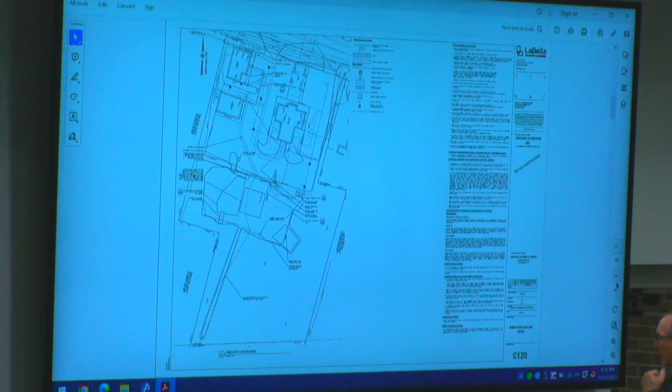I was planning on reaching out to him sometime next week to discuss that. There is room for a vehicle to be in the entrance and not in Route 376, and there is also the opportunity for them to bypass that initial entrance and come around through the entrance further to the east. I was going to discuss that with him and see if those were options, because he may have you sign something or put some signs up or something like that. Okay, so you'll have to discuss that with him, but I concur. I think I noted that as an issue early on, so I think that's something that has to be addressed.

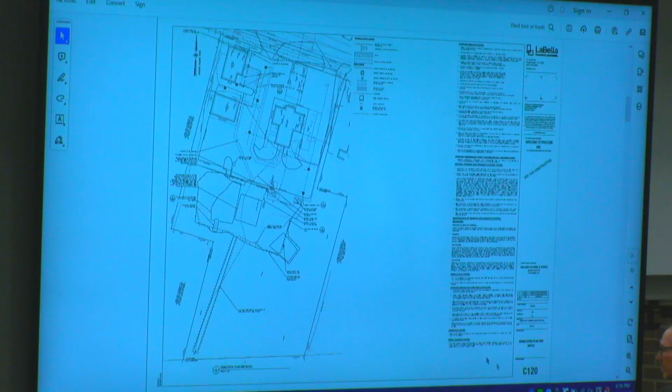He also wants you to indicate the location of the tenant parking spaces. Where are you proposing for the tenants to park on the site? Can you point it out? So let me switch to that sheet.

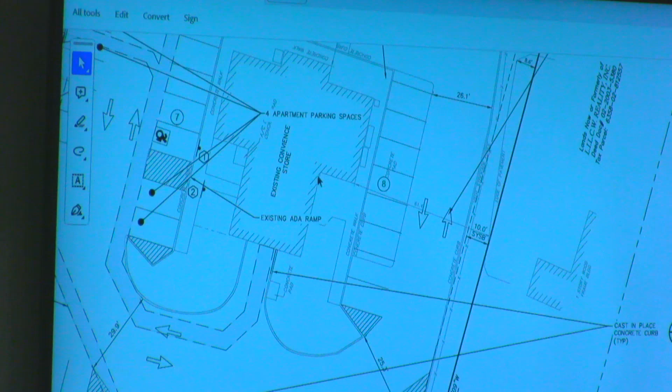So we identified a few locations for tenant parking, given the nature of the site. Spaces here would be for this building, and spaces here and here would be shared between this building and this building.

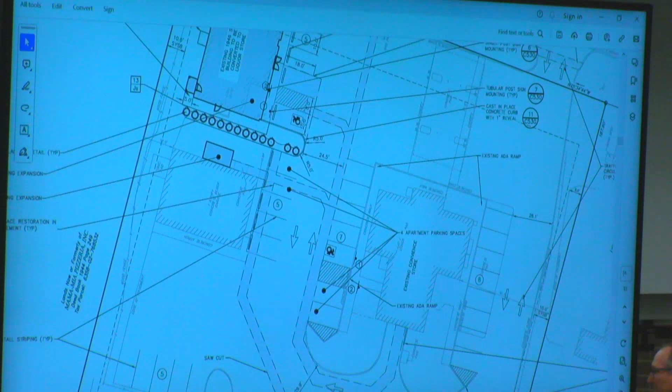Are you planning to sign those spaces as tenant parking only? We hadn't intended to do that as of yet, but we were open to it. I think you may have to, because you can't have a tenant living there come in and find all the spaces taken up by people who are in the store. I would imagine you'd have to at least have some designated spots for the tenants. We can add signs to the plan, that's not an issue. That's something else to address with the traffic engineer.

You also are due to go, I don't believe you've been there yet, to the ARC. Yes, my understanding is the plans are still being developed, and I don't believe they've made a submission yet. Okay, because we cannot close this public hearing until you've met with them, since our public hearing is their public hearing too, so we need to see the drawings. This will have to remain open until they've gone through the process with the ARC.

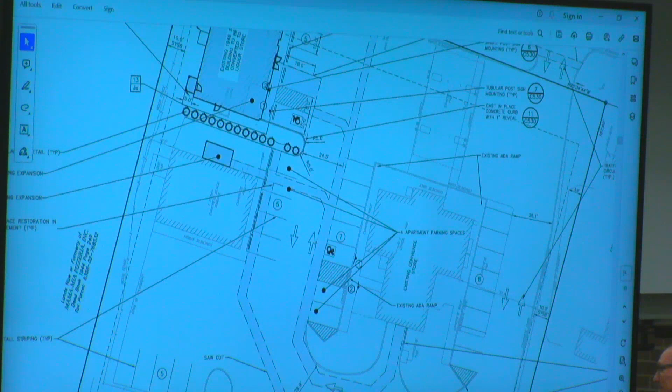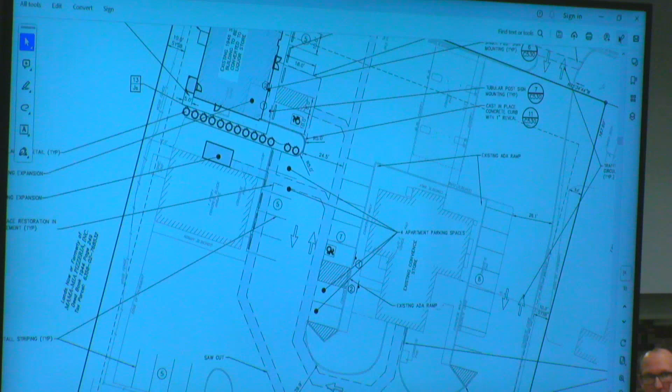Understood. And I know there was some question about the sidewalk path in front of the building that doesn't currently exist - I thought that was added into the plan? Right along Route 376. So there is currently a portion of asphalt that runs along this edge of the building. It ends somewhere around where the cursor is. We are proposing to extend it around to reach the entrance for the apartments in the rear.

But I'm talking about eventually - the idea is that we have sidewalks on, I assume, both sides of 376. So I'm saying that for any projects put in front of us, there should be some proviso made for sidewalks in front of this - proper concrete sidewalks meeting pedestrian specifications. Along Route 376? Yes, there is an existing sidewalk, I think, at least on one side.

So there would have to be - I know there are some setback issues here too, if I'm not mistaken. Am I correct in saying that? I'm pulling it up so you can look at what's there right now. But we've exempted the applicant from that under our discretion, grandfathering the building in from that point, but still wanting to have the sidewalks. Am I correct in saying that, or no? I think it's definitely a good discussion to have. It depends on what happens with this area in the future, and I'm looking right now, there doesn't appear to be anything planned down the street at all.

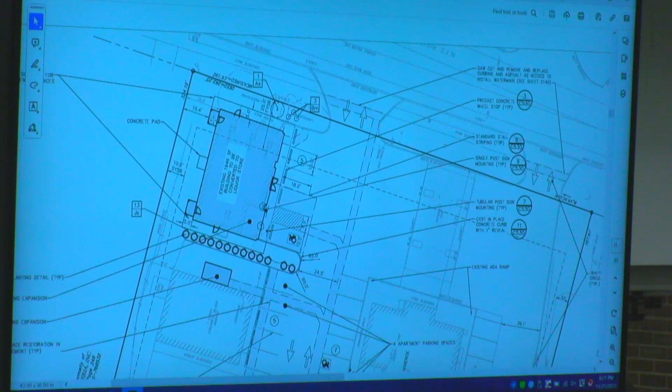Just to see that it continues, like their property line—let's say, using round numbers, it's 100 feet, and they're missing 20 feet—I think if it's part of the project, we should just have them finish it to their property line. Yeah, maybe it's probably 8 feet.

I'm talking about the frontage. Along the frontage, for most of it, there's just a corner missing. On the east side, correct? The east side is missing a little segment, which may be good to have connected because Taconic Innovations is right there.

There is a property in between, so we wouldn't be able to connect all the way across, but eventually we can tie it in, as you said, to the edge of the property line—tie it into that little corner so it's continuous. I think that's a good comment.

I think that's all I had. Any other questions or comments from professionals?

Christian? Yes, regarding the lighting plan, the light levels on the highway side of the liquor store should be brought down a little bit, and the color temperature should be lowered. And this is really a question for the board as to whether or not the light levels on the property in total need to be considered, because right now their analysis is just for the new building. I would just toss that comment out there.

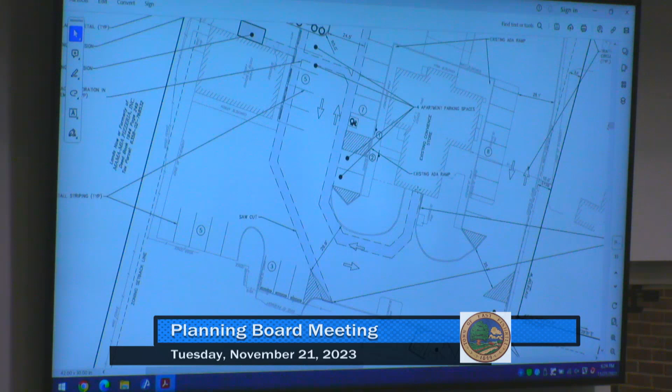There is an existing area that would allow for a vehicle to read in this area here, for the reader to be able to be read while staying outside of the flow of traffic. And then from there, it would branch off to the individual buildings.

Okay, and then you have a separate 2-inch proposed fire service line for the liquor store on its own separate branch. Yes. That's going to need backflow prevention and metering on that line as well, if you're going to do it that way. Okay, yep.

I'd like to just go back to the lighting for a second. Is this gas station open 24 hours? I believe so, yes. Because lighting is a concern—there are residences around, right? So you want to have as low lighting levels as possible, especially when people are living above and having to have those lights in their house throughout the night.

So I would say for sure we should take a look at what the lighting levels are at the rest of the site and make sure that we don't need to lower some of those. I don't believe we have the actual fixture information for the lights on the site, but we can perhaps find a way to record that information. We aren't making any changes to the lighting throughout the site with the exception of the proposed building.

Okay. No, yeah, I mean, I had a light meter at one point. I don't know if we still have it.

I can go out there maybe and take some measurements. It would be limited to what we could pick up with that, not a photometric plan.

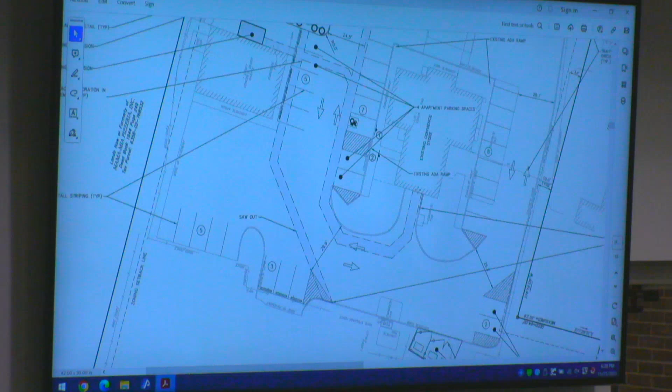Are there any members of the public here to offer comments or questions on the project? If not, anything else from any board members or professionals? I don't have a design thing, but just to note, if you connect into the district it would be as an out-of-district user, which has different rates, just to be aware.

So we'll adjourn this public hearing to next month, if you'll be ready for that. That necessarily needs to include all of the elevations of the buildings and everything, presentation to the ARC, so we can wrap that part up along with everything else we've talked about. Did we do, the next session for the ARC is, do we know when that is? December 5th? Okay, I will follow up with the architect to get that together.

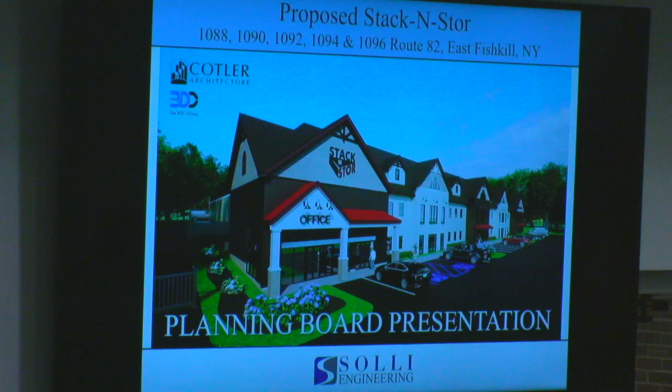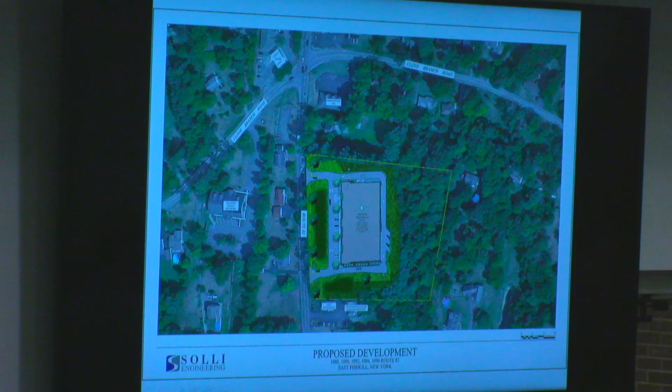So this is a zoomed out rendering of the site if you're looking down from an aerial standpoint. So we have Clove Branch Road here that continues, and then we have Route 82 that runs this direction, and then you have our site. There's going to be 2 full movement access drives there with stop signs, so you can enter on this side right here, and you can enter to the south here, and you can also exit. Both entrances and exits are full movement.

As you move around the building, it's one-way circulation, so there's a gate here, because the intent of the business is you arrive, if you're interested in renting a self-storage unit, there's a multitude of parking along the front of the building that is ungated, unsecure, so anyone can come up and access that. You enter the rental office, fill out necessary paperwork, there's a list of prohibited items, things of that nature.

And then you receive the keys or the passcode to your unit, and that is when you would proceed to around the back of the building. So again, there's a gate here, to enter, it's one way. You proceed around the back of the building, and we have some parking spaces in the back that are for unloading and offloading, and you could also unload and offload in the front of the building as well. I know there are questions about some elevations, and I'll get to that in just a moment. But so you'd rent your unit, you place your stuff, and then you'd exit the facility out the one-way drive, continuing this direction.

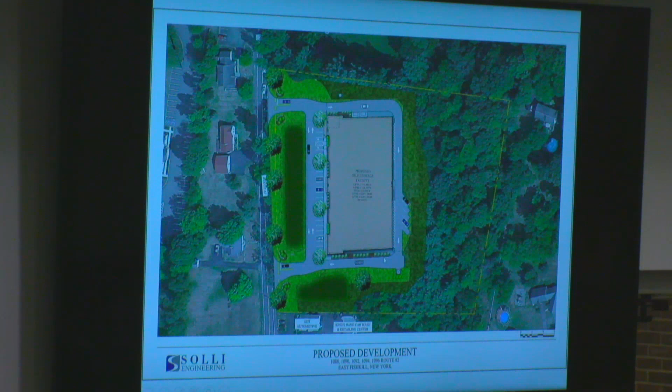Garage doors in the back? Yeah, so there's another gate in the back right here that prevents people from entering this direction. So you have to go one way, up this way, and then down, and there's another gate when you want to exit this way, because we do have land bank parking, which I'll get to in just a second.

So this is our site plan. Current town regulations require us to have 83 parking spaces. Typically, for this applicant, we do no more than 15 to 20. It's not a high traffic generation site. You come, you drop your stuff off, and then maybe they see you in 3 months, 6 months, a year even. It's a storage facility, so there's not frequent trips, or maybe sometimes there are, but the traffic is very minimal, so typically we do 15 to 20 spaces.

This facility has 25. We're land banking, or proposing to land bank, 58 spaces as part of our proposal. So that's the reason the gate is located in this area, because in the future, if we are required to construct those land bank spaces, we wanted that area outside of the gate so everyone could access it. But again, we provided necessary supporting documentation that we don't believe our facility needs 83 spaces. We wanted to maintain as much green space as possible and limit the amount of pavement and asphalt that we are required to install.

Michelle, why so many spaces for a self-storage facility? The storage parking requirement in our code was not intended for self-storage, it was intended for storage like warehousing storage. So it was 1 to 1,000, and the parking schedule has not been updated.

Previously, for Stormville Square storage, I looked at that tonight. We had approved 29 spaces for 36,000 square feet for that building, but I believe we actually were considering less than that. They wanted the additional parking because at the time, with COVID, they weren't exactly sure how they were going to be using the building. But I think we can look at the information, or have Brendan look at it, and determine that I would agree they do not need as many spaces as our code requires.

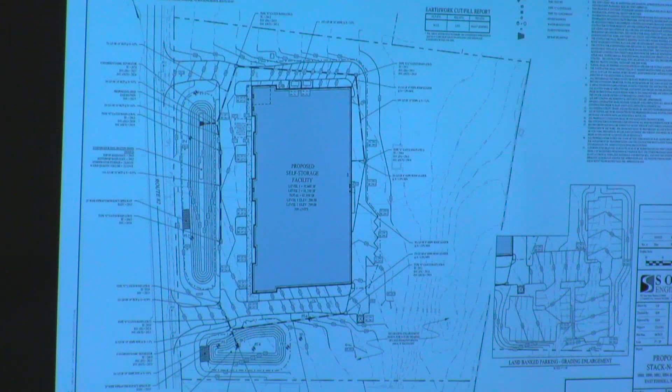If you go back to the site plan - is it one lane of traffic that comes down with parking spaces off to the right side? That's correct. One thing that comes to mind is maybe opening that space up more, all the way to the north end of the building, designating a fire parking space parallel to those parking spaces, so if we have to operate on that side of the building, we're not crammed right up against it - we'd have a little space away from the building.

I appreciate that, that's a great comment - we did provide fire lanes here but they're rather narrow, so we could look at making this area additional pavement and striping it, on the opposite side running up the north side. The reason we're tucked out there is there's a residential zone line, but it's not a building we're proposing in the residential zone, so I don't believe it would be an issue, but I'll double check with town staff.

Are you proposing any grading in the R1 zone? Maybe a little bit, but hardly anything at all - we're trying to keep all the commercial activity out of the R1 zone. Right, I think that's a salient point too, that all the commercial activity has to stay in the commercial zone.

Correct. So why do you need two entrances for a building like this - is that because of fire? Just circulation and access. It's hard for large trucks to make tight turns on site. For example, if we eliminate this entrance, the fire trucks have to come here and try to make this tight turn, which cuts off parking and landscaping, so it's just easier in terms of circulation and flow.

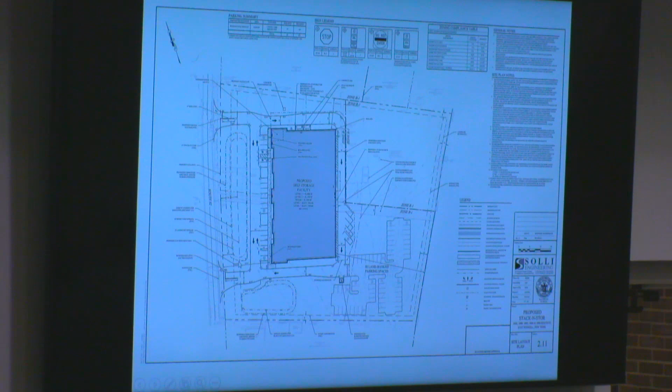And what about the hours and the lighting? Because you do have residential homes behind you and around you, and we want to make sure that the lighting isn't going to cause glare and issues for the folks living around you. So what I'd like to see, what we've required on the other storage facility, is the lights in the evening to just go on motion and on timers, so that if no one's back there, they're not on.

That's something we can look at. If you look at our lighting plan here, we actually have 0-foot candles, and we're not even close to the residential rear. We modeled it, and there's 0-foot candles surrounding the edge. Even with the lighting we currently have designed, there's actually 0 pole lights even in the back of the building—it's all just building lighting. All the pole lights are in the front, shown here, 1, 2, 3, 4 lights. So there's only building lighting in the rear, and those foot candles are at least 150 feet, at 0-foot candle, away from that residential border.

I think the issue usually comes when you're looking at a building and you see the wall packs with bright lights on them—that's usually what causes the problem, even though they can have low foot candles. So if there's a way to reduce the impacts to any of the residential homes nearby, that would be great. Are they shielded right now? Correct, they're dark sky compliant. Okay.

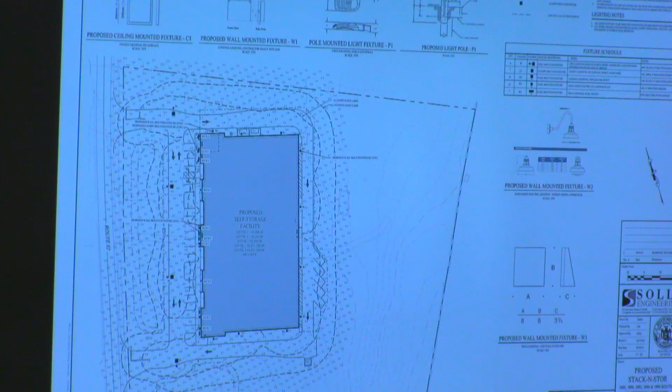What about in the front of the building? And actually, I wanted to ask about how many doors are in the back—are you entering only in one? Is there one entrance, or multiple entrances? Correct, there's one main entrance located in the center, right here. There's one main entrance, but there's 3 or 4 doors there.

It's right near the parking spaces. So you can get in at other locations? In the rear, there's only one, but in the front, yes, there's multiple exits and means of egress.

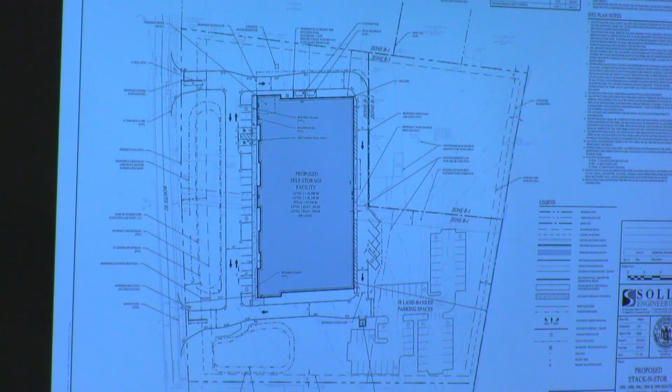Do you have fencing around the stormwater retention basins? Yes, we do. There's a fence around both ponds. What kind of fence are you planning? I believe it is chain link with privacy slats.

I had a recommendation to make it split rail fencing, something more rustic, because it's visible right from the highway. I think it'd be more attractive, for sure. It's something we're definitely open to. Thank you. Probably cheaper, too.

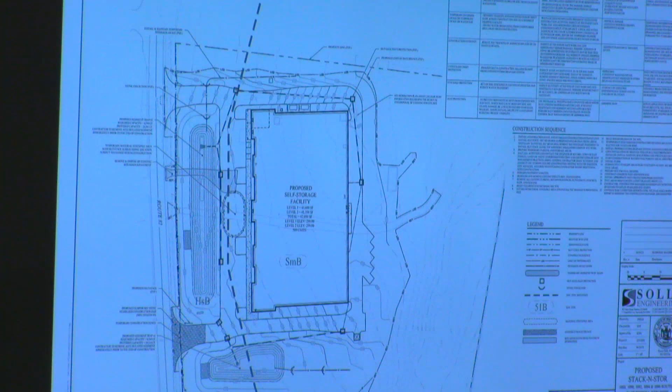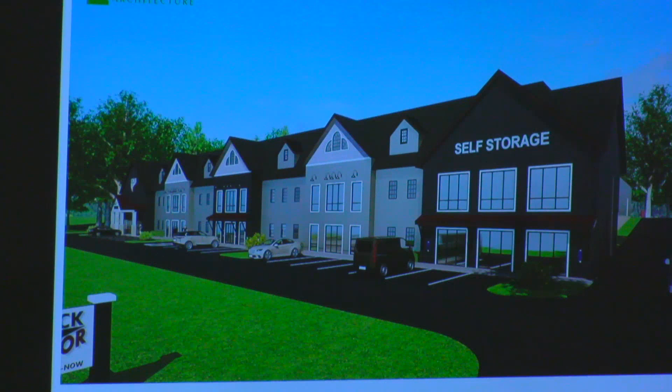Perhaps. Do you have a drawing of the back elevation? Do I have, I'm sorry? A drawing of the back elevation. I don't have one, let's see... This is the front of the building. No, I don't have the back, but if you look at the grading and drainage plan here.

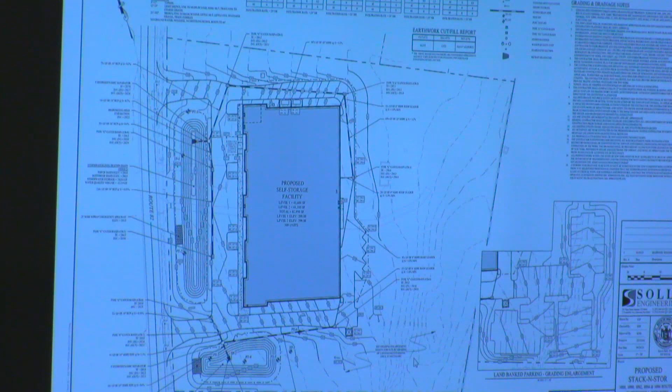Again, this is elevation 282, and then we're at 299, 298 in the rear here, and then this ridge. I don't have a building elevation of the rear, I apologize. I have the front and the sides at this point. Let's see, I might have a rear actually.

Yeah, right here, here's a rear elevation. It's not in color, I apologize, but you can see the access doors in the center, and then the rear, it's just kind of an open facade, if you will.

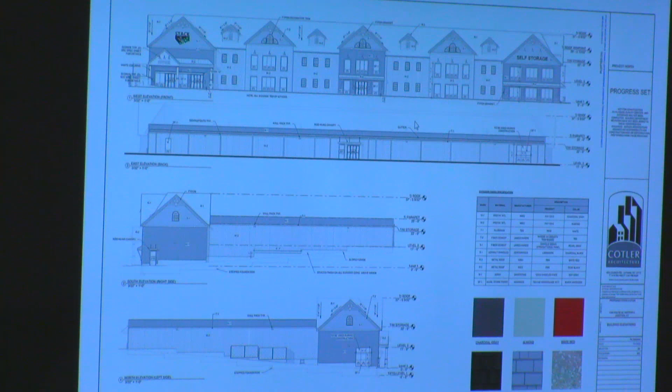What's the length? So there's no garage doors in the back? No. So how, but people unload in the back? Yes, there's these main access doors that open 6 or 8 feet wide, so you can get your items through in the back. But there's no garage doors per se. It's not allowed per town regulations.

Has this gone through a code review for life safety? I don't believe so at the moment. I wouldn't think so, because you don't have enough exits in the rear. What's the width of that building? 250 or 75 feet. You've got to come up with multiple ways to get out of the back of that building. Understood. We will have our architect make sure they do a code compliant review.

Did you not receive the Fire Advisory Board comments from September? I apologize, that might be on us. I'm not aware of comments from the Fire Advisory Board. Provide that, plus, since it's changed since we last looked at it back in September, we'd like another latest set of plans to review and comment on. We'll absolutely provide them. Thank you.

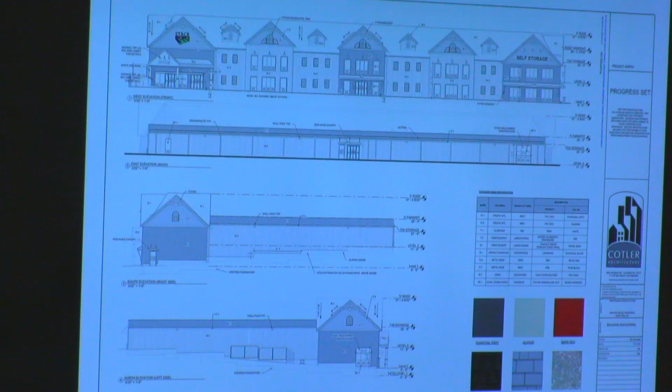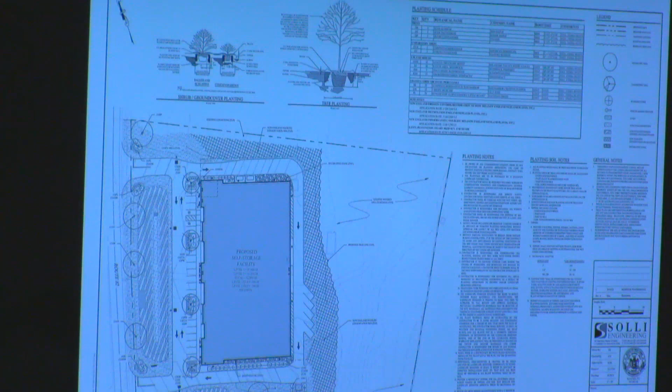Okay, other questions or comments? I have some comments. Go ahead, thank you, Christian. From the plans in the report, it indicates that you're estimating about 14,500 cubic yards of material to be removed from the site. Is that correct? That is correct. We're going to look for an estimation of how many vehicle trips that's going to take and where you're going to put that material, because that's not an insubstantial amount of material at all.

Understood. We did back of the napkin math today, and it's about 2 to 3 trucks an hour for 20 or so working days, but we'll give an exact estimation of how long and how many trucks and where the material will be going. Yeah, because I believe there's a question on the EAF about vehicular impacts during construction.

And also just clarify whether or not that export quantity includes the grading from the future land bank parking. I know you did grading for that. I don't know if that number included the land bank parking or not. Don't believe it did, but I will double check.

Okay, when you say 2 to 3 trucks per hour for 20 days, are you assuming like a 24-hour work cycle? I'm just trying to understand the volume. No, and again this was just quick math, just during like a regular work day. How many yards a truck? 19? Yeah, something about that.

I think ours was around 600 or 700 trucks. That's 768 trucks, times 2, because it has to come in and go out. That's over 1,500 vehicle trips. Okay, so my math is a little off, I didn't count them coming back. And that's going to be front-loaded on your construction window because you have to get a flat site to put your building in, obviously, so it's going to compress that.

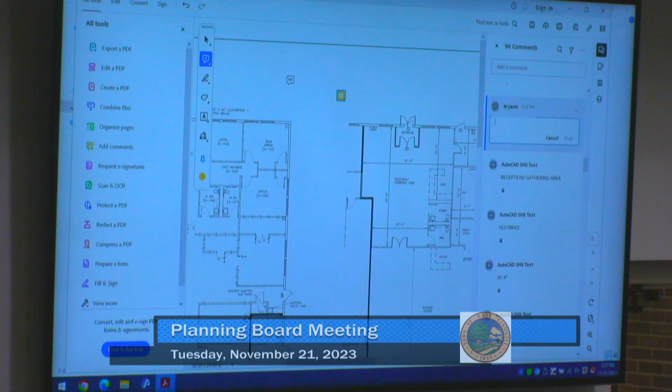That'll happen. There's probably 30 to 40 youth at this location, so maybe 15 cars will be out in front of the building. Our main experience is on Sundays for worship services, which will be two services, 10 and 11:30. You'll see a fluctuation of cars as they're changing between services, but no huge events, no concerts, none of that stuff going on.

I know that you're across from the soccer fields there, and on Saturday and Sunday mornings there's a lot of people that use that lot because there's not enough parking for the soccer fields.

I can answer that. We've actually worked very closely with the soccer community, especially for tournaments, where we've given them parking. But the parking is for this building, it's not for the soccer fields.

I understand that, and we have had tenants complain at times, which we've addressed. East Fishkill Soccer has been very good working with us, and we've been working with them, especially during their Memorial Day tournament. They come out, they put signs in, and we let them park in different areas. Even with the soccer, the people that do migrate over mostly park at the Wiccopee Plaza, and less at 10 Corporate.

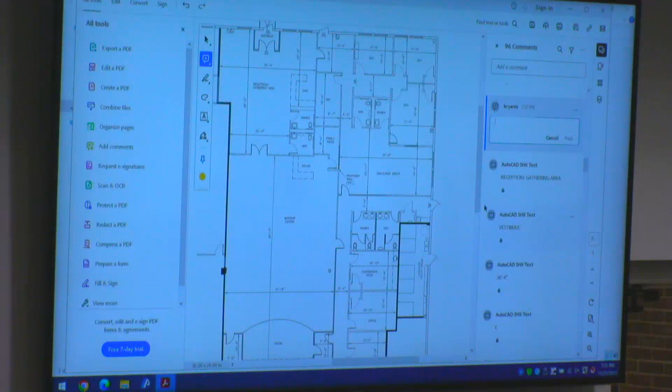So then you would deter them from parking? Correct, when services are in place. And with this particular project, one of the first things we'll do is talk to the East Fishkill group and let them know now that there's a tenant there on Sunday, and you definitely can't be parking in there. Okay, and they send out emails to all the teams, and they have a pretty good line of communication.

Okay, other questions or comments? You are applying for the shared parking special permit, so because it's a special permit, we have to have a public hearing. You do? Yeah, we also have - and I'll look to the attorney to make sure I'm saying this correctly - a special permit for church use as well in our code. So would they be going for the church use and for the shared parking? So I have a public hearing next month on both.

Sure, assuming the board agrees. Will you be ready for public hearing next month? Yep, ready now. As you probably already heard, Michelle instructed a previous applicant, you've got a very short window here to get it done, but it can still be done. Okay, very good. So I'll accept a motion to schedule a public hearing for this applicant for the December meeting. So moved. Second. All in favor signify by saying aye. Aye. Any opposed? Okay, all right, good.